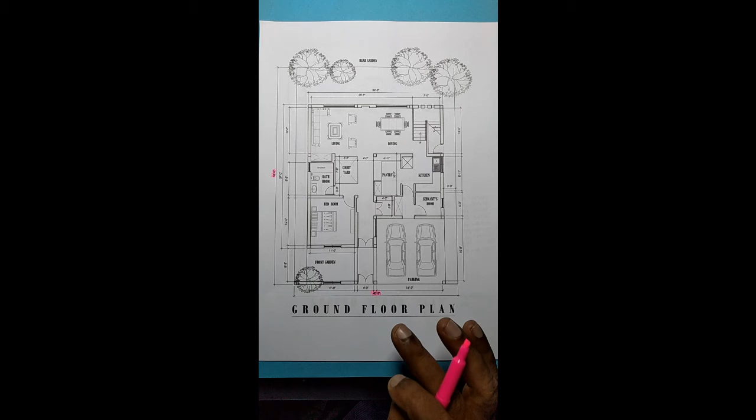In this video, I am going to illustrate house type LH1. First, you need a site space of 56 feet by 40 feet 3 inches. Even though I am giving these areas, they can be slightly changed. Now I will explain the spaces.

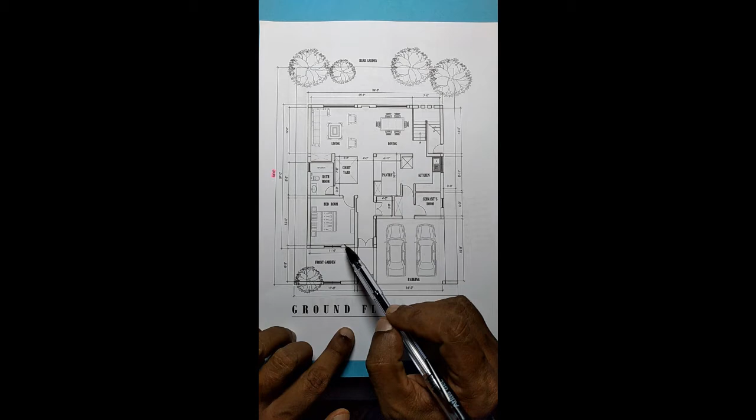I am assuming this is a roadway from which you can enter the house through the gate, the wicket gate, into the main door. Through this corridor, you can enter the living room. By the side of that corridor, there is a bedroom and the toilet. The bedroom is 11 feet by 12 feet. The bathroom is 8 feet 5 inches by 5 feet.

There's a courtyard in the center. You can use this as a courtyard or void, which is 7 feet by 5 feet 9 inches. On the other side, you have the pantry and the kitchen. In the entrance corridor, there is a space by the side of the corridor which you can use for the puja room.

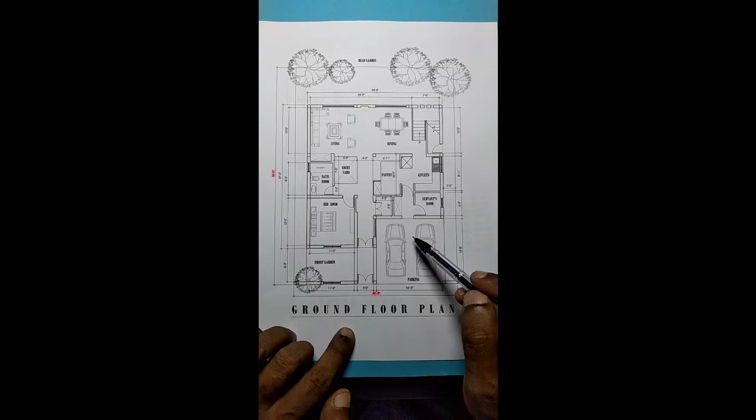The other way, there's a double garage. From the garage, you can enter through a service corridor into the kitchen. By the side of the corridor, there will be a servant's room which connects outside. Through the kitchen, you can serve the food into the pantry and then to the dining. Even though you are serving from here, you can also serve through this archway to the dining. And this is a staircase which is going up.

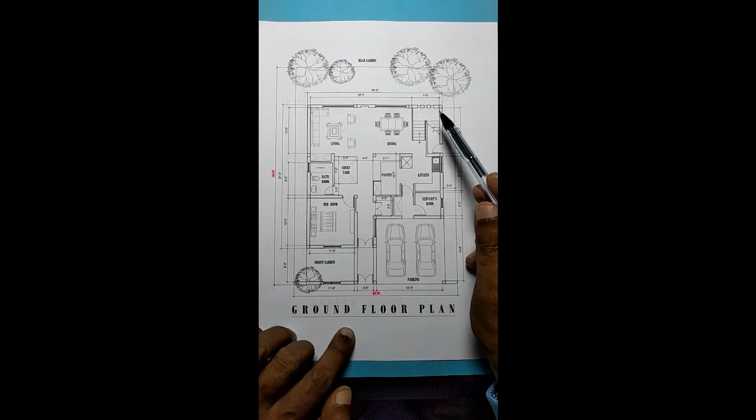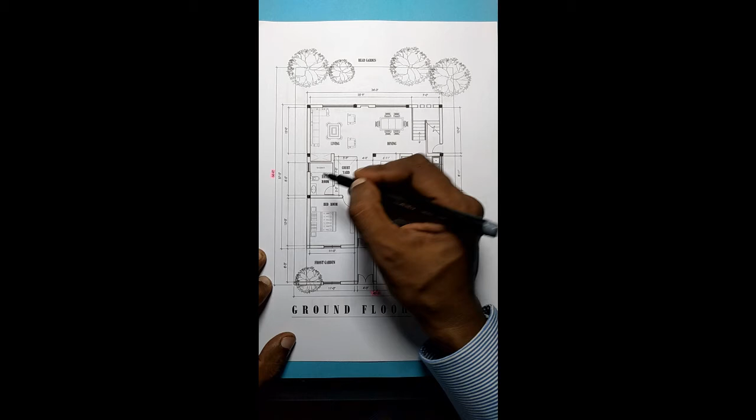Now I will explain the basic structure of this house. I will mark the RCC columns which give the strength to the upper floor slab, and I am using 9 inch by 9 inch RCC columns at these locations. Even though I am giving these column sizes and positions, you have to consult an engineer or architect

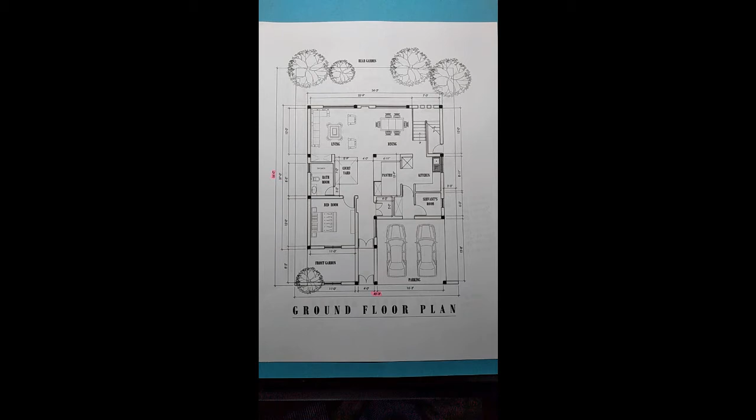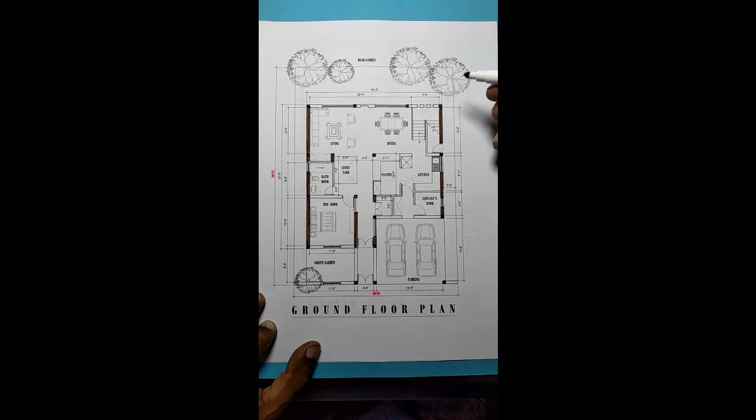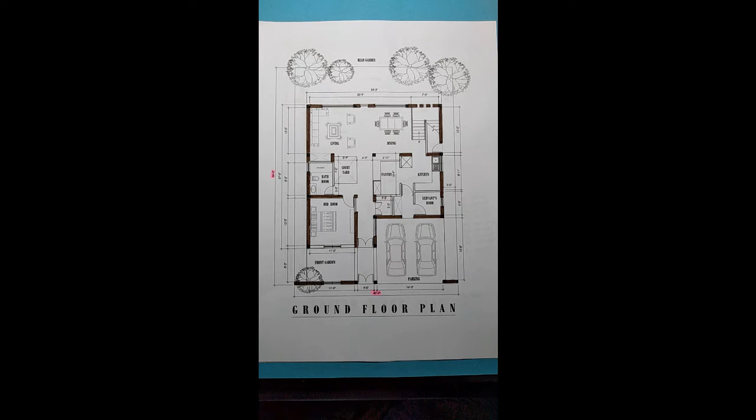to get the details. For walls, I am using full bricks, that is 9 inch, or half bricks, 4.5 inch thick walls. I will give a separate color for 9 inch walls in this plan. And now I will mark the 4.5 inch thick walls with pink color.

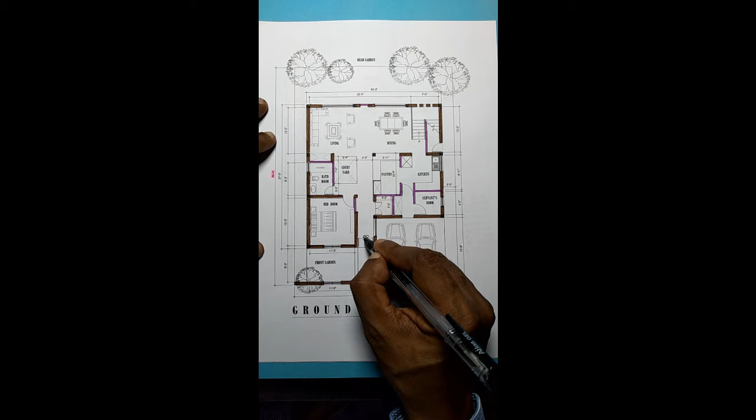Now I will give you the door and window sizes. First we start with the entrance. This is the entrance way to the house. There will be a grill door. We tag it D1. This is the main door to the house. That is type 2. The room door is D3. Bathroom door D4. And from the service entrance, the door to the servant's room is D4. I will give the sizes later.

The kitchen door D3. Underside of the stairway, there's a room which you can use as a toilet or a store. The door for that is D4. And this is the door to the puja room, which will be a timber decorative door. It's a special door. I will tag it as SD.

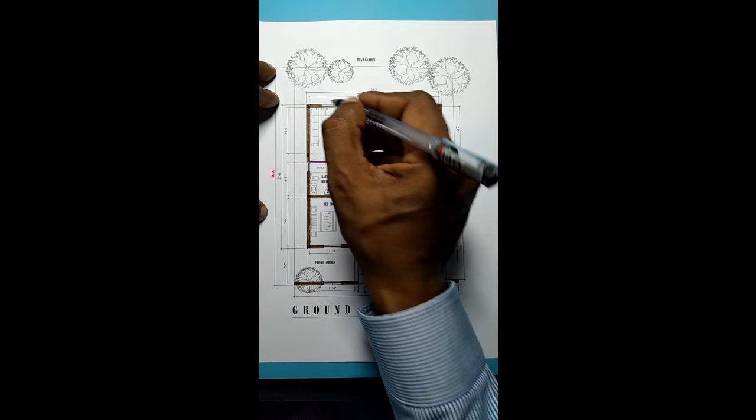Now I will give you the window sizes. I will start from the living room. The living room window is DW1, which is a French window. Again, the dining window is DW1, again a French window. And for the staircase, I have used glass blocks. I have tagged it as G.

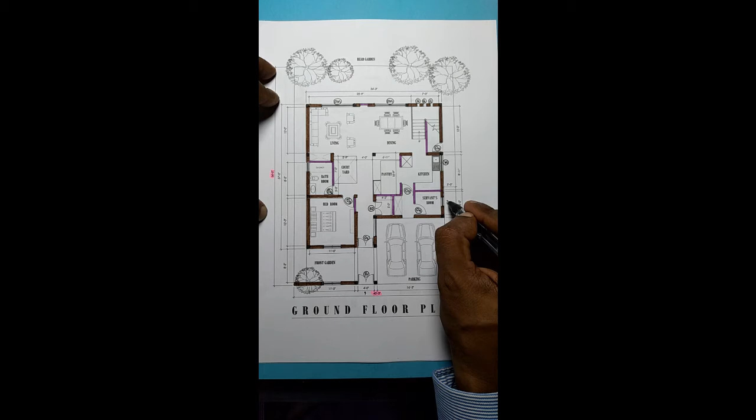Then we come to the kitchen. There's a window. I will tag it W1. Then there's a window to the servant's room or the storeroom. I will tag it W2. To the front, this window, I will tag it DW2. Again, a French window. And for the toilet, to get ventilation, I am using a fan light. Now I will give the sizes. D1, the entrance gate, 4 feet by 9 feet.

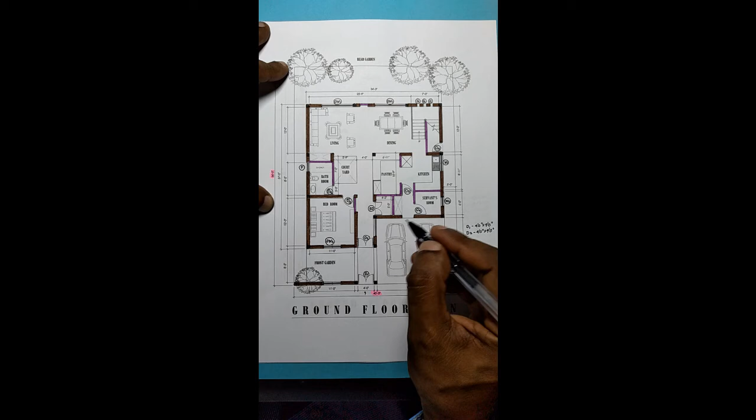The main entrance, D2, 4 feet by 9 feet. The room doors, D3, 3 feet by 7 feet. Bathroom doors, storeroom doors, D4, 2 feet 6 inches by 7 feet.

Then we come to the windows, DW1, 8 feet by 9 feet. DW2, 4 feet by 9 feet. W1, 4 feet by 6 feet. W2, 2 feet by 6 feet. Fan light F for the toilet, 2 feet by 4 feet.

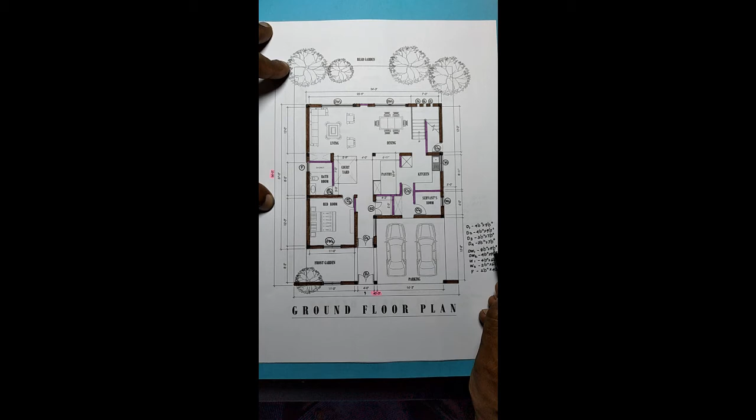This is width and this is height. Pantry counter is 2 feet 9 inches high. Again, the kitchen counter, 2 feet 9 inches high.

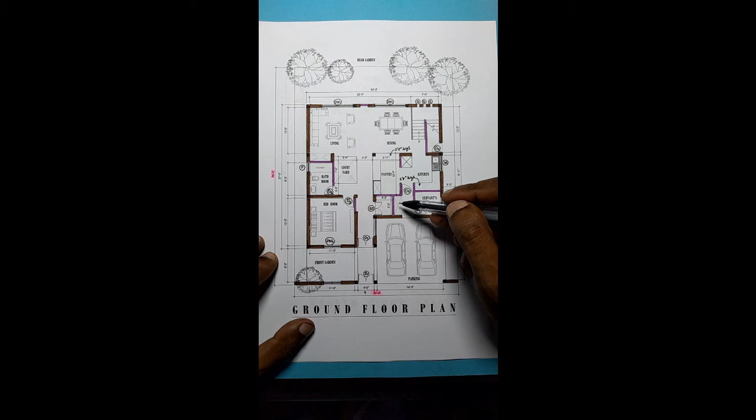You can make these out of concrete, and there will be a wall cupboard or a store to store the garden tools and all that stuff. You can store it here. And by using this staircase, you can go up.

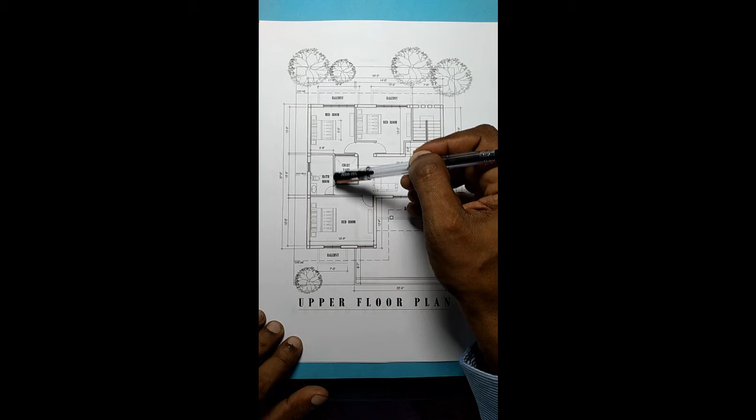And there's a courtyard or a void, which you can see the downstairs from this void. And this is the bathroom for all these 3 bedrooms. And there's a living room, which you enter, and from there you go to the bedrooms.

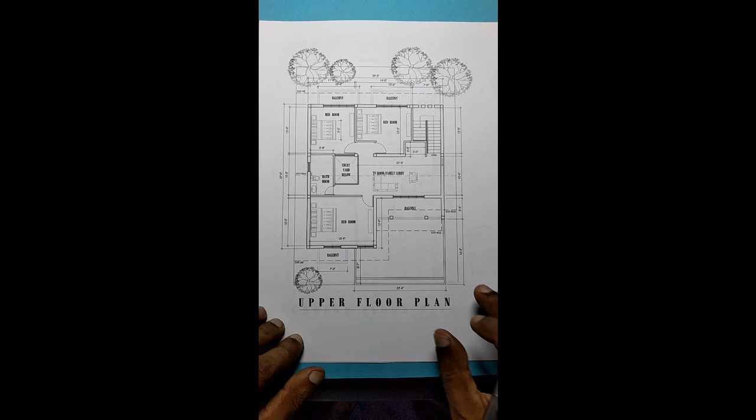From the living room, you can enter through a balcony into a front terrace area just on top of the garage. And by the side of the TV room, there's a space I have utilized for linen room, for ironing and washing. Now I will illustrate about the structure.

I will mark the 9 inch by 9 inch columns, which start from the ground floor and continue up to the roof. These are the locations.

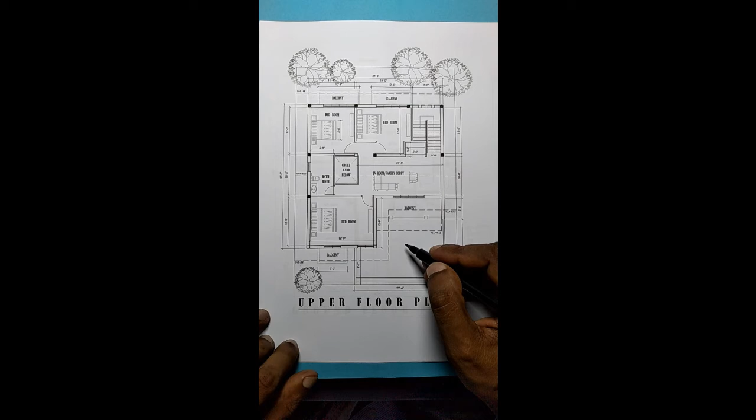To the first floor, these columns are more than enough to hold the roof. You don't need the front 3 columns, you don't need to continue to the first floor. Now I will mark all the other walls.

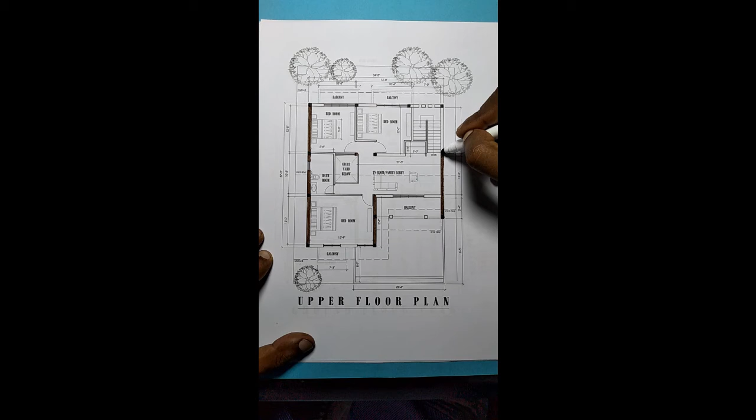I am using 4.5 inch thick brickwork. I will color it with purple color.

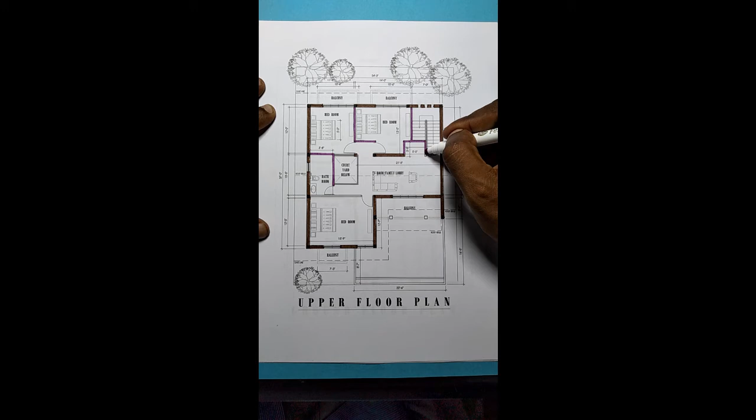In the balcony, I'm using two 9-inch by 9-inch brick columns. I will color it with brown. And this is a roof terrace area.

All the sizes given here, you can see the sizes. This is a terrace, open terrace.

You can enter through to the balcony by opening this French window.

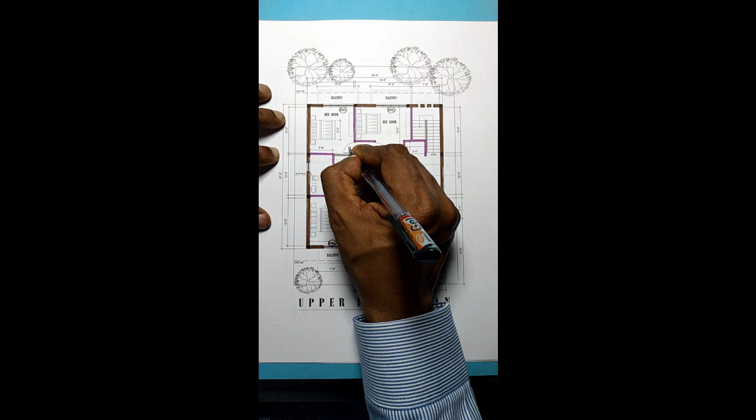Now I will give you the door sizes. All the doors are D3, 3 feet by 7 feet, as in the ground floor. Toilet door will be D4.

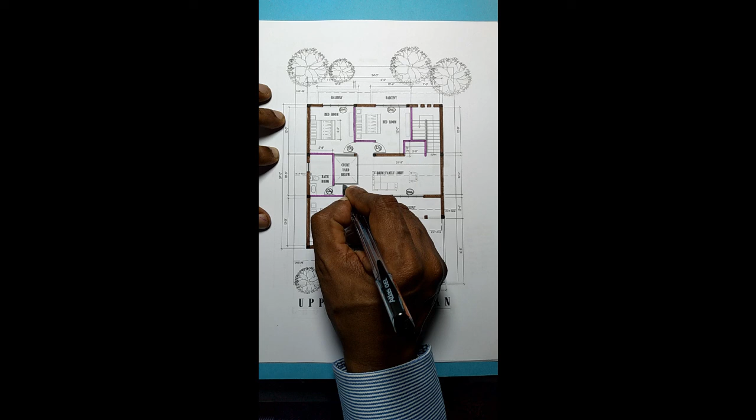Now I have explained all the doors and windows, and I will give you the heights of the railings. This is a 3 feet high railing, and this is a 3 feet high wall. Again, this is a half wall, and in front of the terrace there is a flower trough. You can put creepers into this, and there are 3 small balconies to all the bedrooms. All these railings are 3 feet high walls.